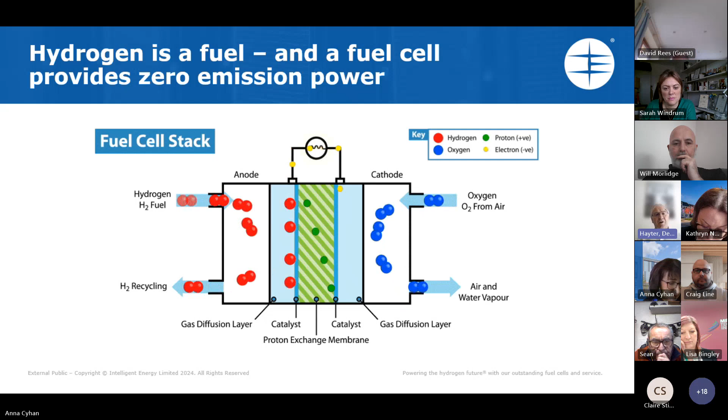But the key thing is, and to the next slide, please. The key thing is that as it comes from a fuel cell, which is based on an electrochemical reaction, it's not around combustion, and that gives you zero emission power. So continuous power for as long as you provide the hydrogen and the air. And as I say, no combustion involved with the fuel cell.

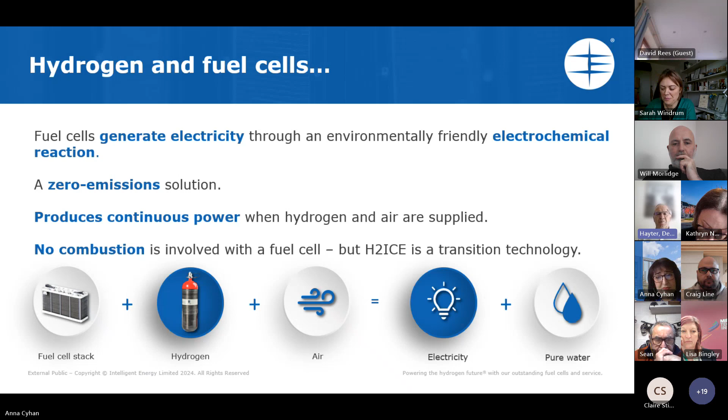It's electrochemical, but hydrogen internal combustion engines are part of the pathways that are being used in order to help reduce the carbon content. It can still be zero carbon, but there may be NOx and some other small components of emissions involved. And the next slide, please.

To give you some examples of how that technology is being implemented, around the use of the fuel cell and the hydrogen as a fuel, we have plenty of examples of drones. As a company based in Loughborough, we are one of the largest suppliers of the fuel cells that are used by drone operators in the UK, but the vast majority are actually going into international marketplaces.

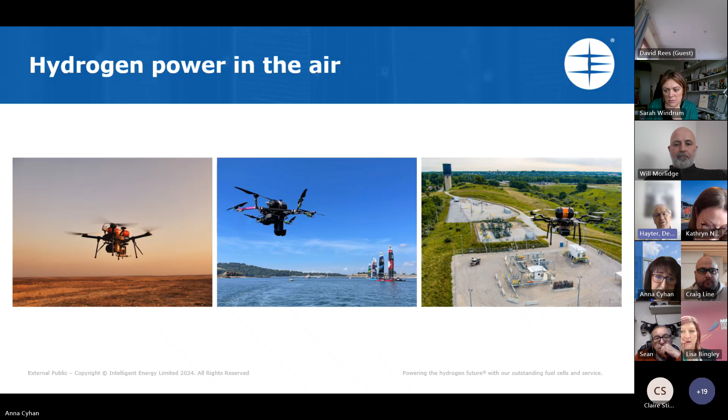So you can see there over the ground surveying, filming of events, over the water, can be anywhere, could be a racetrack, or in industrial applications where you're monitoring and surveying sites, pipelines, power lines. There could be many, many different applications that are being used and will continue to be used into the future. And the next slide, please, will take us to hydrogen-powered flight.

So it's not just about drones. We've already tried with small single-seater aircraft through to larger aircraft. That started back in 2008 with Boeing and will continue into the future, whether it be for so-called air taxis or up to 90-seat aircraft. So that is also a part of the pathway for decarbonising the aviation sector, and also seeing how hydrogen will be utilised in and around airports and the like.

And I would expect that we'll have a bit more to say, given that East Midlands Airport is in the area and will be utilising other forms of hydrogen and fuel cell technology for powering mobile equipment in and around the airport, as well as powering the aircraft itself.

On the ground, yes, this is something that is actually from back in 2011-12, to give the indication that this is not new. It's been happening for a while. These were fuel cell taxis that were running during the Olympics as part of the VIP fleet for the Lord Mayor at that time and for his teams.

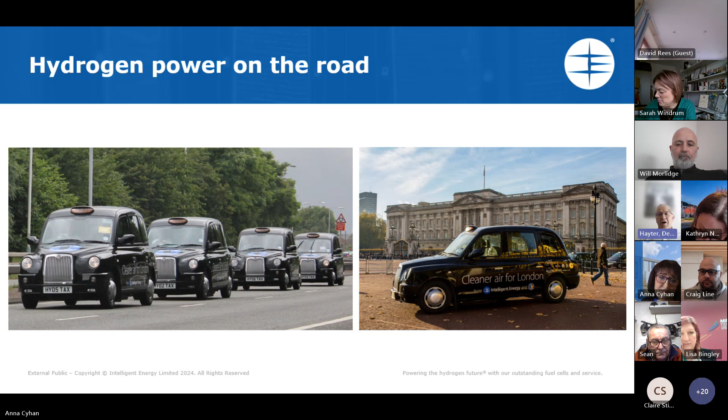And next slide, that takes us on to where else you can use it apart from in vehicles. It's currently being used in railway, in trucks, in buses, and also indoors. So in material handling equipment, in factories, up mountains.

The middle image there is actually providing power into a feedlot and milking parlour for cattle in the southern French Alps. And then, as I say, around in factories, so powering material handling equipment or guided vehicles, automated guided vehicles.

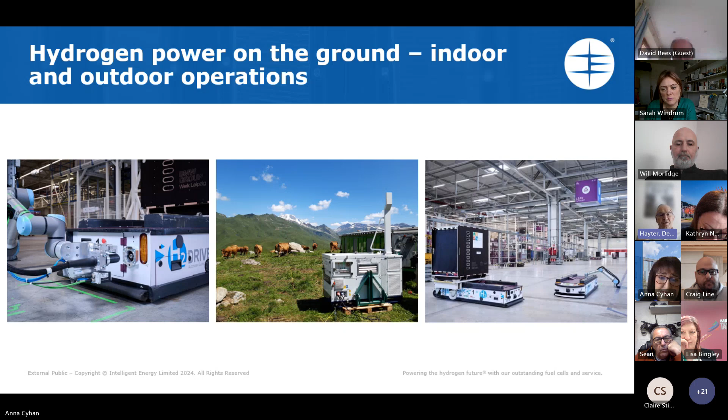And next slide. So this, in that context, is in the skills side and the requirements. It could be involved in constructing, implementing, integrating, operating the vehicles, the powertrain. It could be in refueling. Middle image for hydrogen refueling for part of that fleet of taxis. And it could be in rocket science. The liquid hydrogen, together with oxygen, has been used as the propellant for getting spaceships up into the air.

So in the context of today being the day that NASA has launched its rocket to the moon, then you may be involved, and there may be requirements that spread right across all of those areas and other areas as well. So that's a starter.

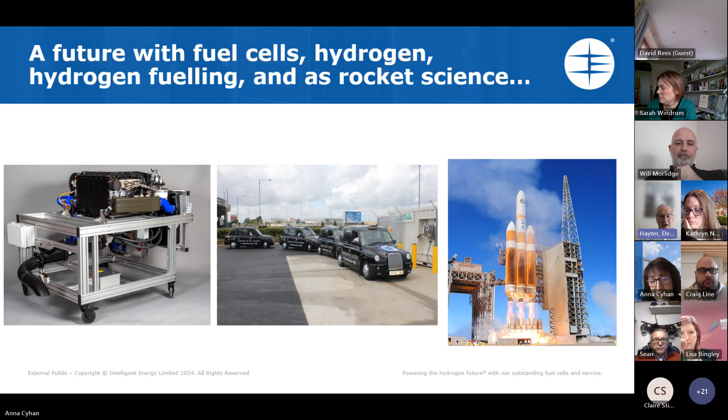And I can now welcome Will Morlidge as the Chief Executive of the D2N2, and also specifically the Midlands Hydrogen Partnership. It's a partnership that you will see there's a lot of activity, many other companies that are involved, and that this is a cluster that is driving some of the activities for the East Midlands, Leicester and Leicestershire as well as D2N2. Thank you, and Will, over to you.

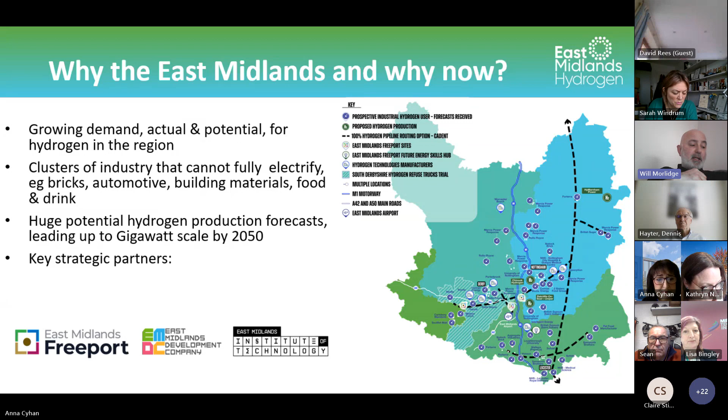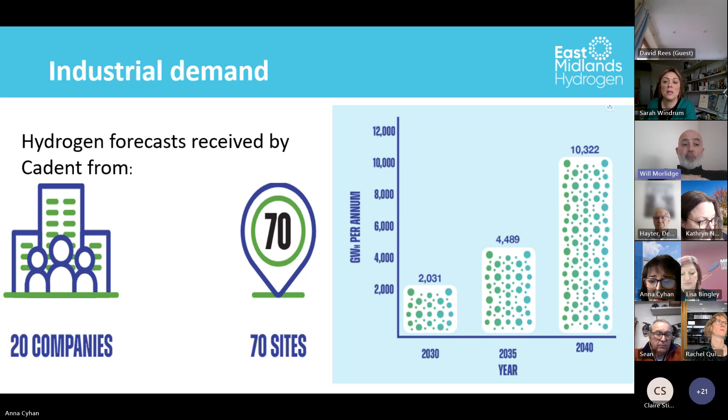So I mentioned demand, and this is work that Cadent did on behalf of the partnership. When they talked to the top 20 consumers of natural gas in the East Midlands region, who between them own around 70 sites, they got a demand forecast of over 10 terawatt hours by 2040, which, as you'll see from the graph, is almost 5 times what they think it'll be in 2030. So this is a power source that's going to be needed for a while, and we're going to have to scale up production, storage, transmission, no end. But really exciting that businesses here are basically saying, you can bring us the hydrogen, we will use it. Next slide, please.

And on the other side of the coin, around production, we are aware of plans for around 650 megawatts of production here inland in the region. And when you get a chance to skip back to that map of the assets, you'll see there are 6 former coal-fired power stations along the Trent and the Derwent. Those places have got massive grid connections. Why would you not repurpose them for the production of green power? But they're not the only sites.

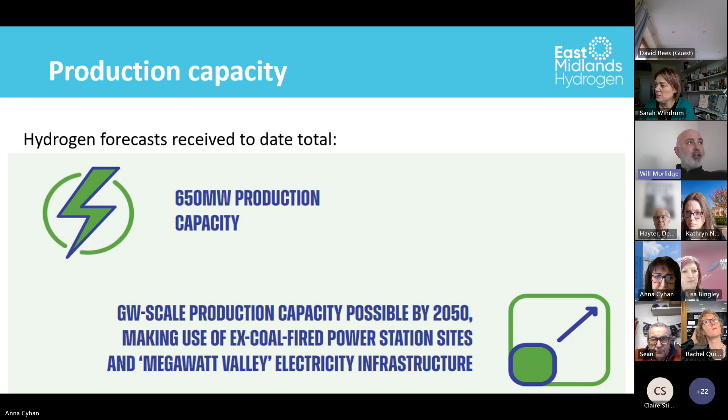One of the really interesting things to East Midlands Hydrogen is how many SMEs we've come across who are trialing different approaches to electrolysis or anaerobic digestion or whatever it happens to be. So many different techs that could be part of the solution for hydrogen. We're not saying hydrogen is the solution for every business in every place, but within the hydrogen sphere itself, electrolysis, which is the main technology at the minute, will not be the solution for every place. And maybe we'll get to a point where every dairy farm in the country is doing something really interesting with an anaerobic digester that's producing hydrogen. Well, I was going to say let's hope. No, let's not hope. Let's just make it happen.

Next slide, please. In terms of why is the LEP involved? Well, across the two LEP areas and that little bit of Staffordshire, we're talking about a massive amount of potential business growth in the region, new jobs, new businesses, and many jobs being protected.

So people will need to upskill from old gas industries to new hydrogen industries. We don't want to lose those people from the workforce. We want to retrain them and upskill them. So massive potential wherever you are in your career, I think.

Next slide, please. In terms of the environmental benefit, I'm not sure if Sally from Cadent is on the call, but I always get a bit nervous because this is her stat. But it's a massive amount of carbon sequestrated, and effectively, we can sequester by switching to hydrogen the equivalent of all the domestic emissions of the East Midlands region.

It's kind of a mind-boggling environmental turnaround, which is great when you consider just how dirty, frankly, our region is, given that we were the kind of heart of the Industrial Revolution. We've been building things and digging things out of the ground for so long. We've got a long journey to turn things around, and it's just fantastic that we can repurpose some of those assets to be part of that net zero journey. Next one, please, Anne.

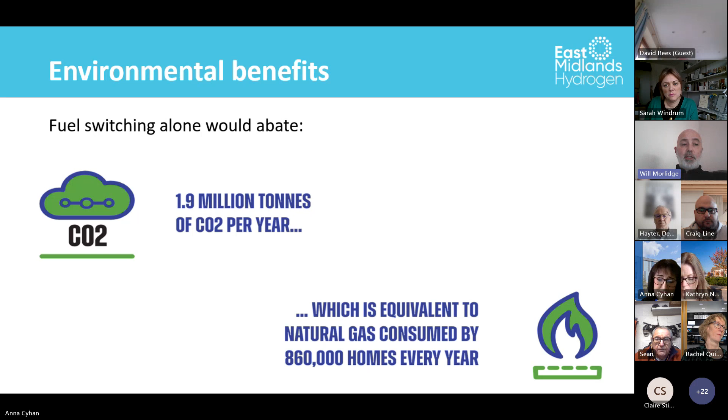And just in terms of current activity, what are we doing? Well, the first thing we're doing is trying not to duplicate. So if you're doing something and you want us to stop because you're worried we're going to step on your toes, let me know. That is absolutely not what we're about. We're about amplifying people's messages, plugging gaps, and sharing best practice.

So we're supporting a number of bids at the minute. There's loads of funding streams out there that are specifically about hydrogen or could have a hydrogen link to them. So earlier this week, I was with the University of Nottingham and Loughborough talking about innovation in hydrogen storage, a potential £2.5 million investment in the region there.

But as you'll know, if you're on this call, funding from government for innovation appears to be fired out of Whitehall in a blunderbuss and just scatters so widely that trying to put a net around it and bring it back together in the regions is quite a task. We're also working with the Freeport, with Rachel at the IoT, to better understand the skills ecosystem that's needed and to try and get it in place.

We're working with, in the D2N2 area, the Future Combined Authority, but equally in the Leicestershire area with city and county authorities to develop a shared vision around how we make this East Midlands picture work. And really pleased that the plans are getting quite advanced now for the development of the East Coast Hydrogen Pipeline. That's the thing that would pipe hydrogen from the Humber, where lots of it will be made. Some of it will be imported, some of it will be made there.

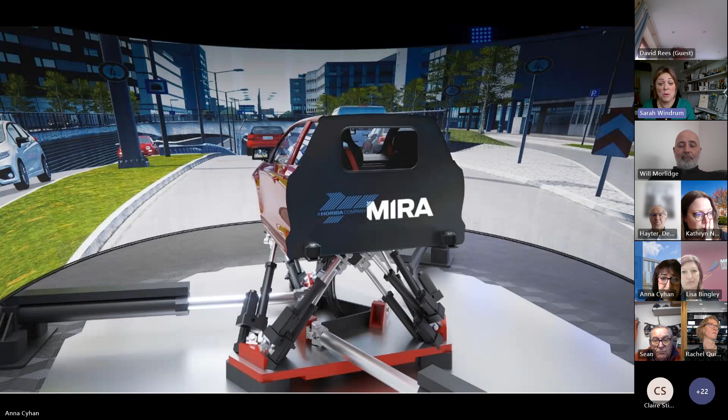And in 2015, we were acquired by the HORIBA Group. And I mention that because HORIBA, again, for those of you who don't know, manufactures scientific testing and analysis equipment, and is very much in the hydrogen value chain, but not as much in the UK at the moment. They're doing a lot of that work in Germany. So again, part of the opportunity here is to bring more of that work in.

Apologies, I didn't realise this has got an animation of things. If you just skip through it, it should all come up.

But yeah, this was just to highlight how we have the blend of engineering and testing facilities across the whole of future mobility.

Can you skip on? Brilliant, thank you very much.

So yeah, this is the technology park and our kind of unique campus. So the technology park is the team that I work for, and what's really interesting about this site, as I say, you've got that core vehicle development expertise around the skills, the engineering, and the test facilities. But then alongside that, you've got this cluster of businesses, and I'll go on to talk in a minute about how increasingly those businesses are moving into areas of clean tech, hydrogen, and fuel cells, and a range of different areas beyond mobility.

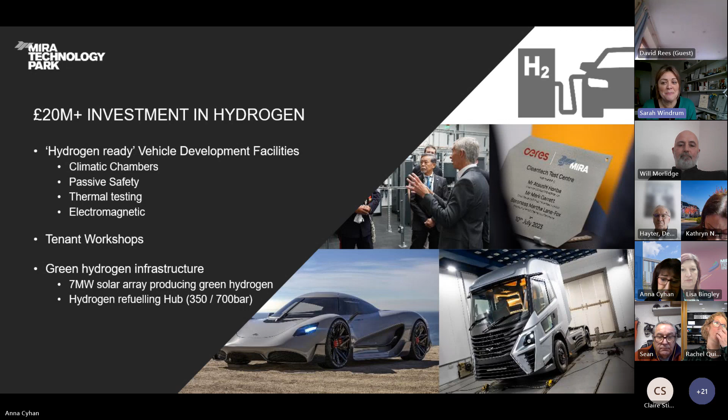Thank you. So I just wanted to talk about a couple of tenants in particular. So this is Viritech, who have been successful in a number of Innovate UK grants in their hydrogen fuel cell technology. So they don't develop the vehicle, they are a tier one supplier into vehicle manufacturers. They do the zero emission powertrain, but their whole process is around making that as light as it possibly can be in order to ensure that it can be used in a variety of different circumstances, particularly when you're talking about freight, when you're talking about payloads and commercial return.

That's all really important that we look at how heavy those vehicles are and what it is that they can carry. And again, it's been great that HORIBA, MIRA and the engineering and testing have been able to work very closely with Viritech. And I know we have on skills as well, but I'm not going to steal Lisa's thunder. I'm going to let her cover that a bit later. Can I have the next slide, please?

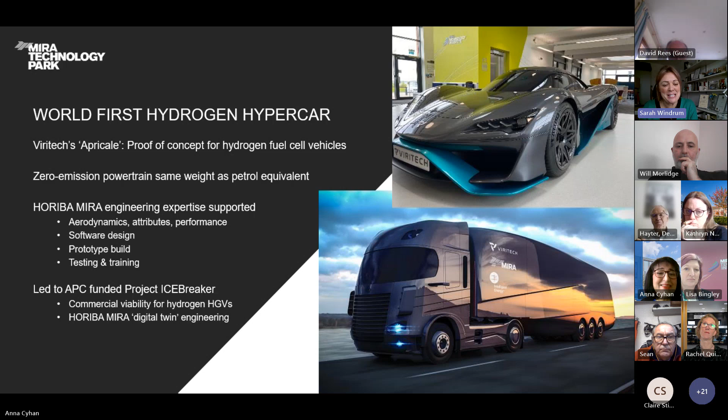Before you start, Sarah, you are at your 3-minute warning, if that's okay. Brilliant. Thank you, Claire. Thank you. I've got so much great stuff that happens at MIRA, I've always got so much to say. So thank you for keeping me to time.

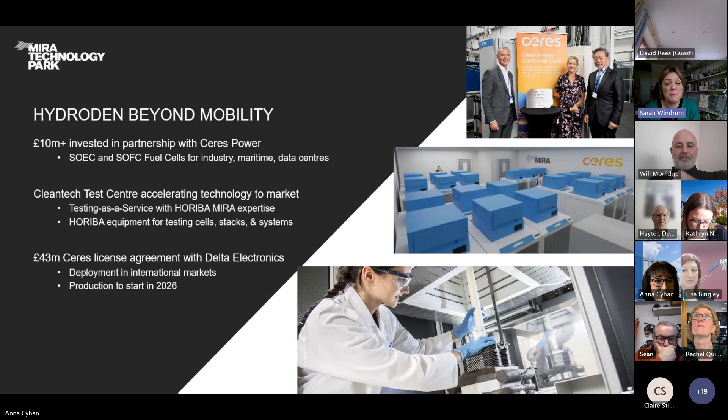So I wanted to mention Ceres in particular because this is hydrogen beyond mobility. As I mentioned, Ceres is looking particularly at how you bring this clean technology, how you make it efficient and affordable in the power market, particularly around data centers. So again, they're a great success story from the technology park perspective. Can I have the next slide, please?

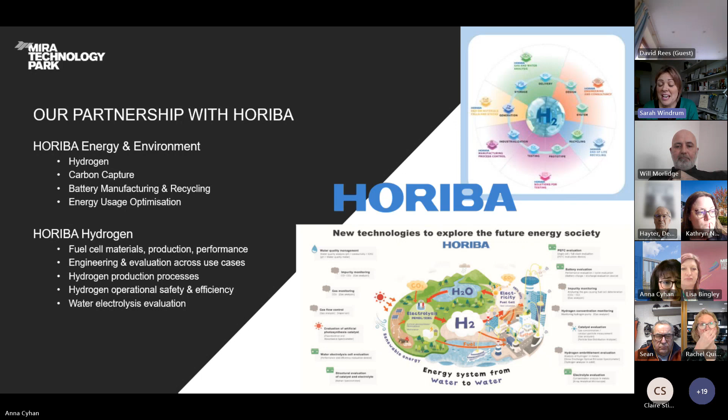So yeah, I just wanted to really briefly mention HORIBA because they are our parent company, but also a global player in the hydrogen ecosystem. And this is just a bit of an overview of the different areas that they work in. But again, really keen to bring them more into this conversation, particularly linking with some of the stuff that's happening with East Midlands Hydrogen and investment in innovation, because it's certainly an area that they are particularly interested in. I think the next slide is skills, so I can skip that because Lisa's going to cover that for us. And then the final one is just about our south site.

This is our Warwickshire part of the site, which has received outline planning consent for development of 2.4 million square foot. So that will take our whole site to over 4 million square foot. And the whole idea is that we're able to offer this incubator to production all on one site, all with the ecosystem surrounding it that I've talked about. And again, we're looking at how we really make sure that site is net zero from the start. So yeah, really keen to engage with companies who are in that clean tech innovation ecosystem and would like to benefit from what we've got to offer at the technology park.

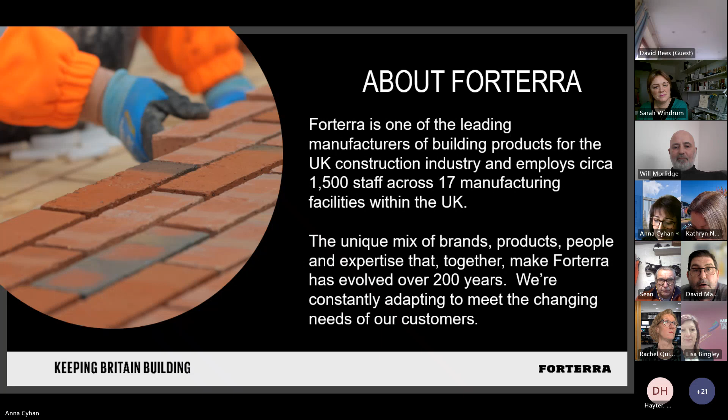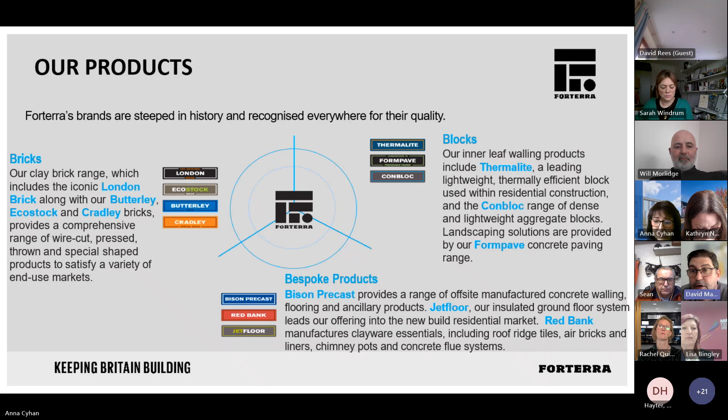Next slide, please. We've got some brands that hopefully you all recognise. On the brick side of things, the Butterley business has been established in the Leicestershire area for almost 100 years. We found it on an Ordnance Survey map going back to 1928, so we've been around a while. You might also recognise our Thermalite brand in blocks and the Red Bank and Bison Precast brands within our bespoke products ranges. Next slide, please. As I said, national business, so a few sites in the Leicestershire area. Next, please.

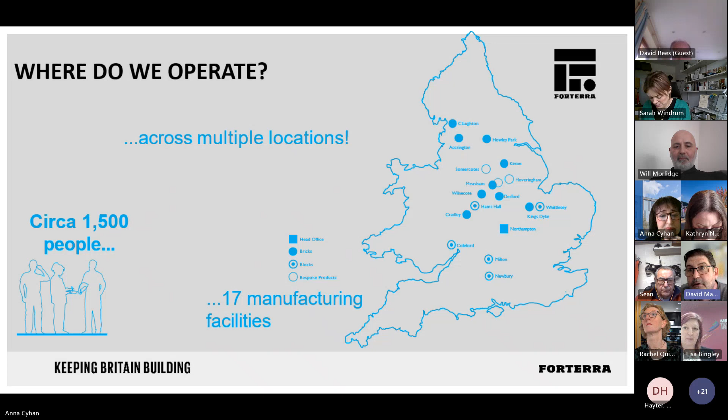And I guess as a business, being sustainable is very important. After all, the products we make last for well over 100 years and generally get passed from generation to generation. So we're very passionate about sustainability, and today the focus is on hydrogen, which is a key lever in us achieving the CO2 targets that you see on the screen. So within our clay products business, we're looking to try and achieve a 33% reduction in carbon per tonne by 2030, based on 2019. And one of the key levers there will be hydrogen.

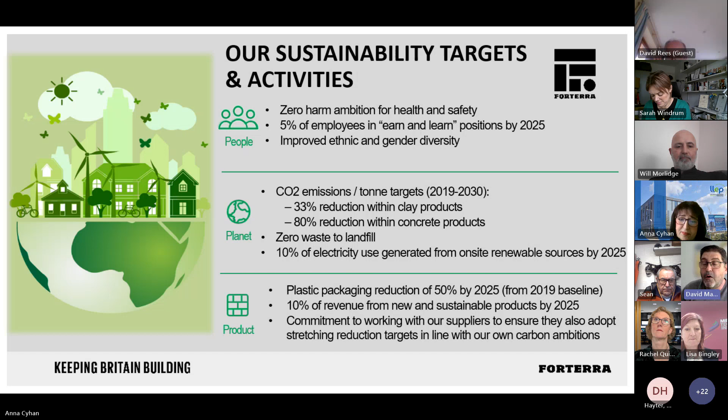Next slide, please. So in terms of our carbon footprint as a business last year, it's about 260,000 tonnes. About 45% of that relates to natural gas. Roughly 45% is process emissions. And this is when the clay goes into the kiln, we heat it and it gives off CO2 from the carbonates, etc., that are in the clays. There's some emissions from liquid fuels, so diesel for distribution fleet and mobile plant, and then our electricity usage. Next slide.

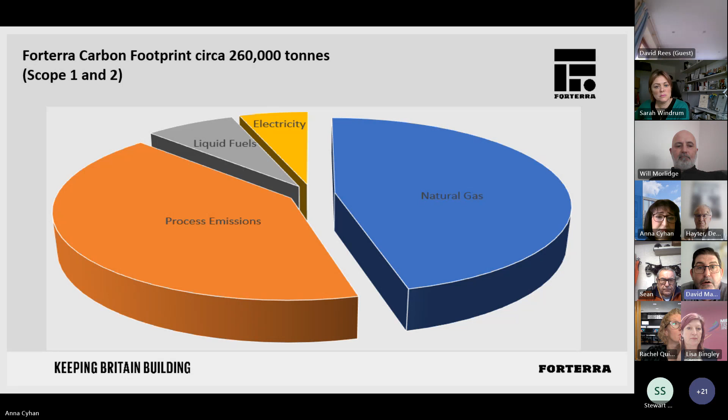So what are our opportunities? So I guess the easiest one to address is electricity. We've recently signed a corporate PPA, which will provide us with 70% of our electricity from a solar farm that's basically being built to service our needs. So that was something we were able to do fairly early on. Represents about 8% of our carbon footprint. The rest of it gets a lot trickier.

So when we look at liquid fuels, you're looking at electric vehicles or hydrogen fuel cells. Process emissions, this is probably the most difficult area. We've been doing some work on carbon capture, and what we've found is it's very difficult and very, very expensive. The initial work we've done, we've recently upgraded the Desford factory, which, just to confuse everyone on the call, is actually near Bagworth, not Desford.

We've recently just rebuilt that factory, and the carbon capture plant would be 10% more expensive than actually building a new factory. So you're looking at the best part of 100 million to build a carbon capture plant for a brickworks, which are scary numbers. And then the other thing that we've been looking at with East Coast Hydrogen and East Midlands Hydrogen is replacing natural gas.

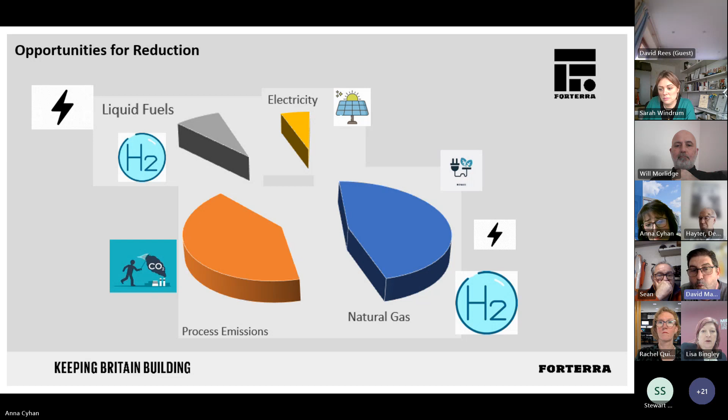And to a degree, hydrogen is almost plug and play, because we can use the same kilns. We'll have to change the burners, but there's a few other things that we'll possibly have to modify. And we're doing a bit of investigation work on what that actually looks like at the moment. So next slide, please. Yeah, I was getting a bit ahead of myself. So this is where we believe we can get to with hydrogen.

So kilns, mobile plant. We've done some work looking at electric vehicles for forklifts. But as soon as you talk to an electric forklift company and tell them you want an 8-ton forklift, they go very, very quiet, because I think up to 5 ton is doable, but we shift heavy product around, and 8 tonnes is a challenge. But I think we've got the first 8 tonne one in the UK at one of our factories. And it seems to be working quite well. But like most electric stuff, it's very expensive to buy in the first place.

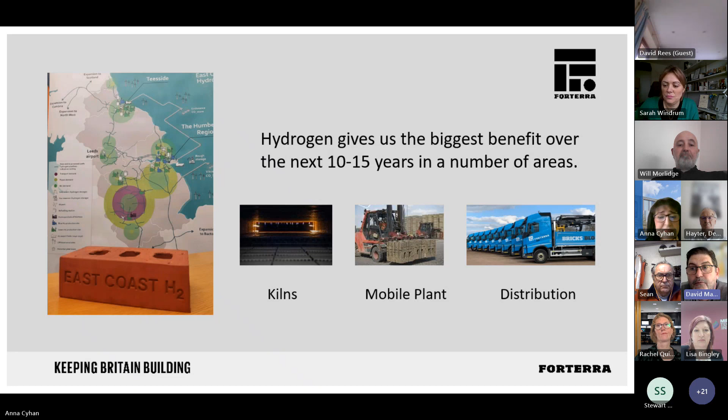And then finally, in the future, we're hoping our distribution fleet can switch to hydrogen. And I think if we can convert those 3 uses to hydrogen, we can probably achieve about a 55% reduction in our carbon footprint. Next slide. So what have we been doing?

I guess one of the reasons why we've got so involved with hydrogen is, as a PLC, we've got a risk register. And on that risk register, it came up that the government were looking at putting 20% hydrogen into the gas network. And immediately everyone says, it'll be fine. You'll hardly notice any difference. But what we don't want to do is get to whenever they decide to do it and find that we can no longer make our products. Or if we can, they're a different colour, because that would be a bit of a disaster.

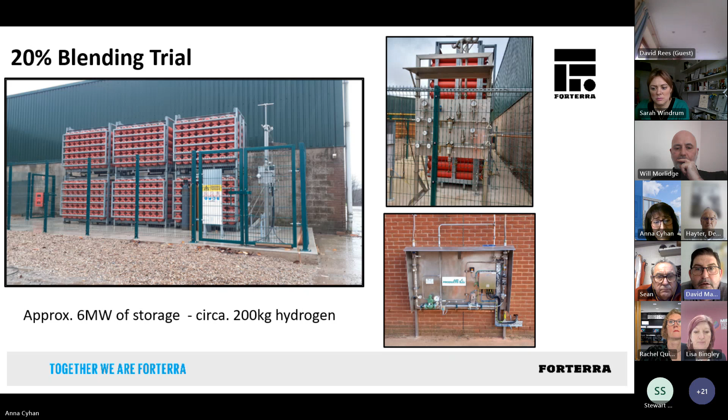David, just before you start, you're at your 3-minute warning. Cool, that's perfect.

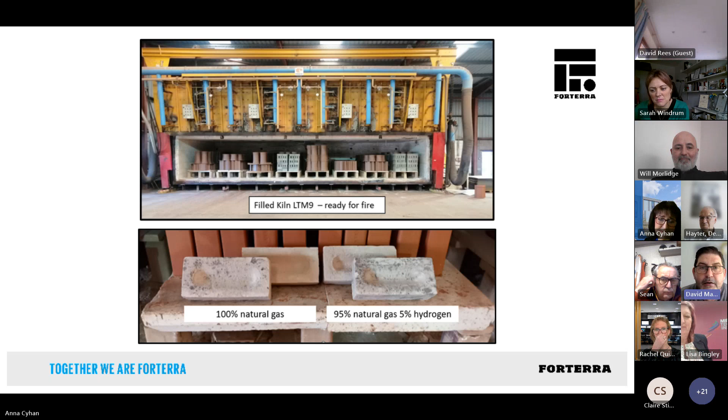This is the kiln that we set up to run on 20%. It will hold about 8,000 bricks, so that's about 1 house. And what we found, it was the dullest trial ever, because everything came out exactly as we'd hoped and expected. Images at the bottom are for when we ran it initially on 5% hydrogen, because we wanted to ramp up gradually. And the difference you can see in the 2 bricks at the back is the shadow from the brick at the front, as opposed to actually being a different colour. So unfortunately, it's a pretty rubbish photo. So that's what we've done on the 20% blending side of things. And then if you go to the next slide.

And I guess the challenges for us, which I guess are the opportunities for the hydrogen sector and the people who will be delivering it to us, is at the moment we have long investment cycles. A new kiln is expected to last for about 25-30 years. When you speak to equipment providers, at the moment there's no off-the-shelf solutions. We finished the Desford plant last year. It was the grand reopening. Work started on building that in 2017, so it takes a long while to build a brickworks.

Product side, we're worried about colour change because of the different temperatures, issues with compressive strength and frost resistance. Probably the biggest change that we would be looking at would be refractories, because of the extra moisture that's potentially in the flame, from the flame.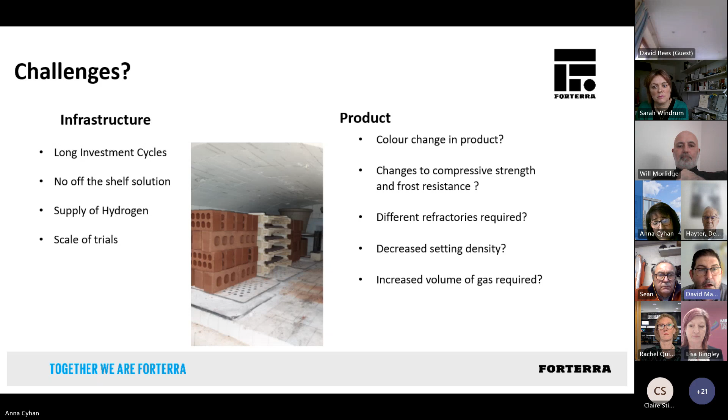The next slide, which is my last one. So what we would like to do next is a 100% hydrogen trial. That's a much smaller kiln, but we need a new control system and a new burner. And at the moment, we got quoted about £250,000 to do it, which is a lot of money for a very small kiln.

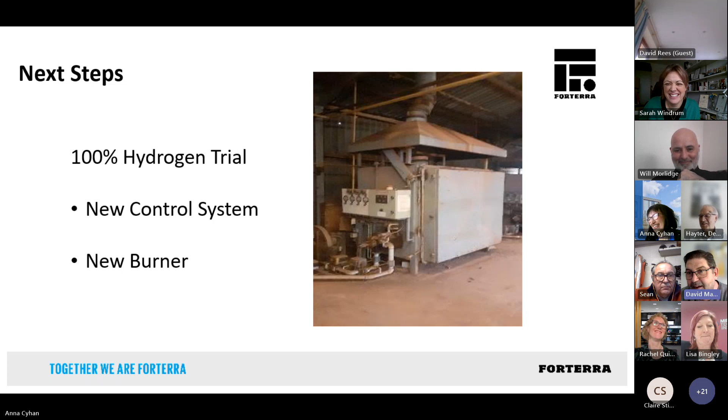Hopefully I've stuck to my 10 minutes because Anna didn't think I could do it with all those slides. So yeah, that's me. David, there is a quick comment in the chat, which I'll feed back to you after the meeting, okay? Sorry, Dennis, for jumping in there. That's okay. But thank you to you, David, for the punctuality. It's much appreciated, and I should have said the same thing for Sarah earlier on as well.

Thank you. David, you mentioned dull trials, but dull trials can be some of the best trials, because they do all of the things that you recognised and don't throw up further challenges. But it looks also as if you've still got quite a few challenges. Availability of hydrogen is an issue. And perhaps, as Will was pointing to, when you're able to get pipeline delivery, or find other ways to generate more hydrogen on site locally, through electrolysis if necessary, then that's only good news for lots of other people.

Moving now to Rachel, we're talking now about East Midlands Institute of Technology, and as you've pointed out, it's an ability to look across higher education down to more specific skills, qualifications in line with regional economic need. And given the diversity of activities, it looks like you've got quite a lot of regional need. So over to you in terms of how you are going to achieve and deliver that.

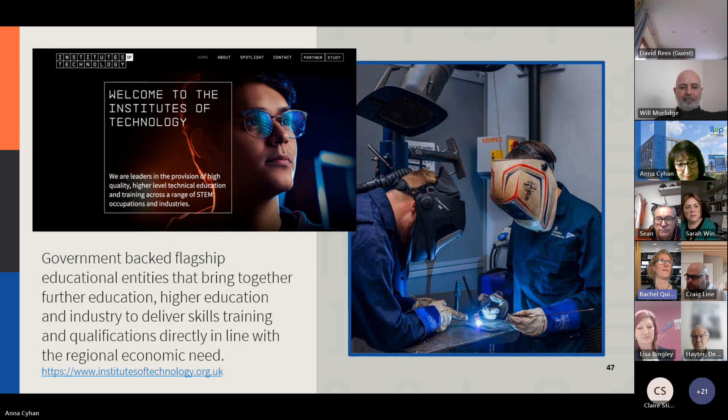We're government backed, we're building some new buildings, but essentially we're taking that partnership and making it more effective. If I can have the next slide, please. There are 21 across the country, and the link in this slide will take you forward.

So in terms of the East Midlands Institute of Technology, from a core education partnership, we are a blend of Loughborough and Derby colleges and universities. Both Loughborough and Derby University have some really strong basis around energy management, production and innovation. So there's a really good footprint there, and Loughborough is working really strongly with the University of Nottingham as well around hydrogen technologies. So we've got that existing within the education infrastructure. We've got those high level skills that will enable the thinking and the transition towards hydrogen. The purpose of the Institute of Technology is to then start trickling that down and saying, okay, as a country, we don't create enough technical skills or enough people making the transition into technical roles and opportunities.

And we're not necessarily upskilling that workforce quickly enough to take on board these new technologies. So the real core purpose of the Institute of Technology is to work with industry, and you can see here the mix of our core industry partners, but we're always looking to talk to anybody and everybody who wants to particularly focus on technology skills and what's really changing in our economic footprint and how can we support that to happen more effectively through education.

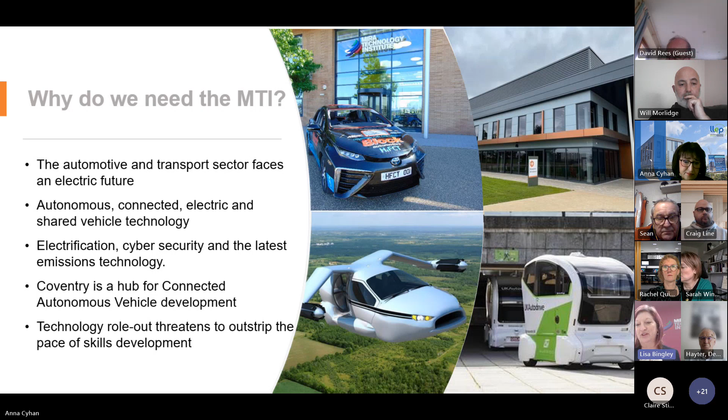So our mission and vision at the MTI is to be a centre of excellence for training in this sector. We hope to deliver specialist skills in the automotive sector and beyond in emerging technology, to create relevant and bespoke courses for industry with industry.

Since it opened its doors, the MTI has welcomed over 50,000 students and delegates. That's in 5 years. Over 4,000 are studying for accredited qualifications, and almost 900 apprenticeships at all levels have come through the MTI. We have had more than 18,000 automotive professionals take part in professional development activities at the MTI in the first 5 years. So very successful so far.

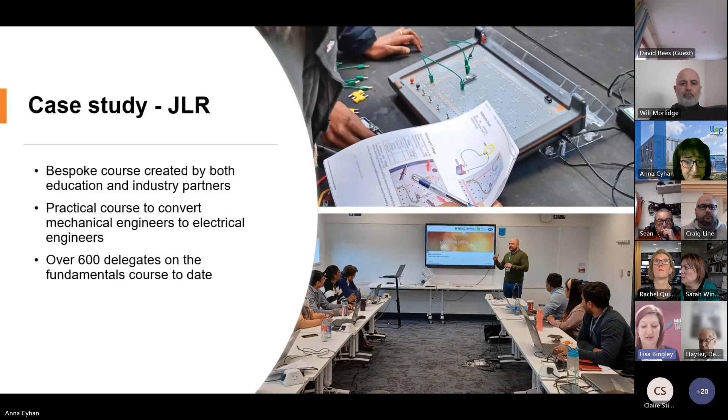So this is a case study that I just wanted to highlight to you. We are currently working together with our partners to develop courses for industry, and this is one in particular we're doing very successfully. We've had over 600 delegates through already on this course, where we've developed the fundamentals part of electrification for JLR's staff. So all of the mechanical engineers obviously need converting to electrical for their new I-Pace. And this course is the starter for 10 to get them on that journey. There's more of the journey, and they do that with our partners, but it's been a very successful course to date. Sorry, next slide.

And our hydrogen courses are being developed in partnership with industry and the awarding bodies to ensure the relevance and develop the skills needed in this area. We go from basic levels, to understand how a fuel cell works, right up to the impact on logistics and commercial transport. So quite a range, and all very relevant in our current atmosphere.

Next slide, please. So Sarah's already talked about the MIRA Technology Park, and I just wanted to point out that's where we are on the park, and in those lovely pictures that she flashed up earlier, we're along with 40-plus other companies on the site. And that's very relevant because we're a training centre with all of those very relevant companies on our doorstep, which means when we develop the training, we're also involving those companies and those facilities within our training, and we have them on site. So we're ahead of the game, as it were. We've got industry on site that we can link to straight away. Yeah, we can drop to the next slide.

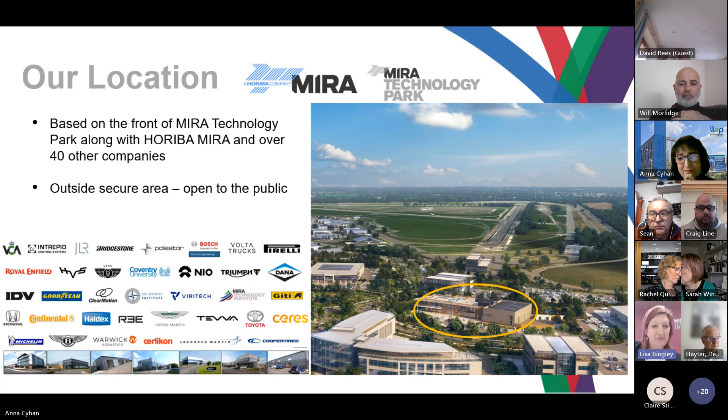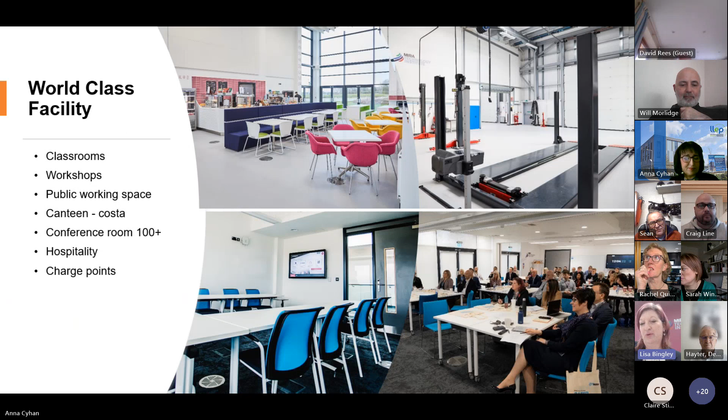So world-class facility, we've got 15 flexible classrooms, 3 workshops. We have working pods on site in our open spaces, and we have a Costa open to the public with charge points and free parking, which is quite important these days. Our conference room can hold up to 100 people, and we regularly run engineering events here. So we have industry training with industry on site. So it makes for a very professional atmosphere within the training area.

And just so, why do we need an MTI? Because there's no quick fix to the issue of skills gaps, because developing talented individuals takes time, doesn't it? We've been talking about this a long time. MTI students are able to access automotive training at any level, whether they're starting at the ground level or they need higher level qualifications. So we can focus on upskilling here.

One of the key benefits to the automotive industry is that for the first time, these skills can be acquired via a single collaborative organisation. This grouping, this collaborative project that we've got here, doesn't exist anywhere else. So we can do all levels. And we've got facilities alongside some of the world-leading automotive manufacturers.

So we provide significant opportunity to transform skills and supply to industry, which gives us a real chance to make a step change in the future productivity of the industry's local, regional and global atmosphere. So there's a lot we can affect. We firmly believe that the MTI represents the future of technical and skills training for the UK and hopefully globally.

And there's no doubt that this project will not be a success without industry, because it relies on the employers taking advantage of this fantastic opportunity and exploiting it to its fullest. We need everybody to integrate with us, to work with us and develop the courses in collaboration with us. So that's my call to action: staying in touch and talking to us about what we can do to help and where we can go with it.